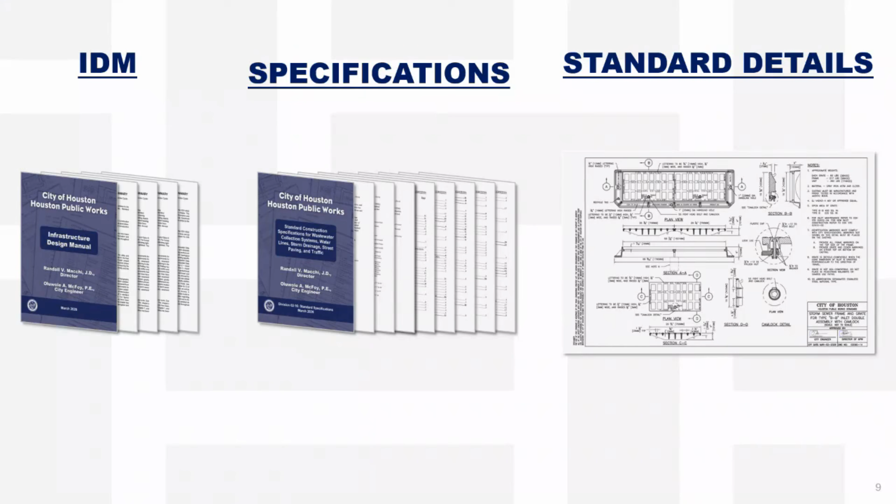The IDM specifications and standard details communicate the city's needs and capture lessons learned. It's my team's responsibility to lead this effort with the support of various stakeholders within Houston Public Works, other city departments, and external stakeholders.

We'll start with a quick overview of the review cycle process. I'd like to point out that an executive summary was released with this year's IDM. It includes a summary of the changes and implementation of the changes. This can be found in the first few pages of the IDM.

For current policy, each chapter in the IDM will be reviewed at least once every 5 years. The city has a review schedule that is posted on the website. The associated standard drawings and construction specifications are reviewed in conjunction with each IDM chapter being reviewed. This year's review cycle included Chapter 9 and associated construction specifications and details.

There's a process to address significant issues within our standards outside of the designated review year. However, care is needed to ensure all stakeholders are informed and changes have been properly vetted. A good example of this would be this year's changes to Chapter 6 of the IDM.

Also, changes prior to publishing can be made with the use of a supplement. The city had 2 supplements this year related to Chapter 9 that were incorporated into the IDM in 2026. Supplements, once properly vetted, must be signed by the city engineer and the director. Once a supplement is signed and put into effect, my team works to implement these updates and notify the community.

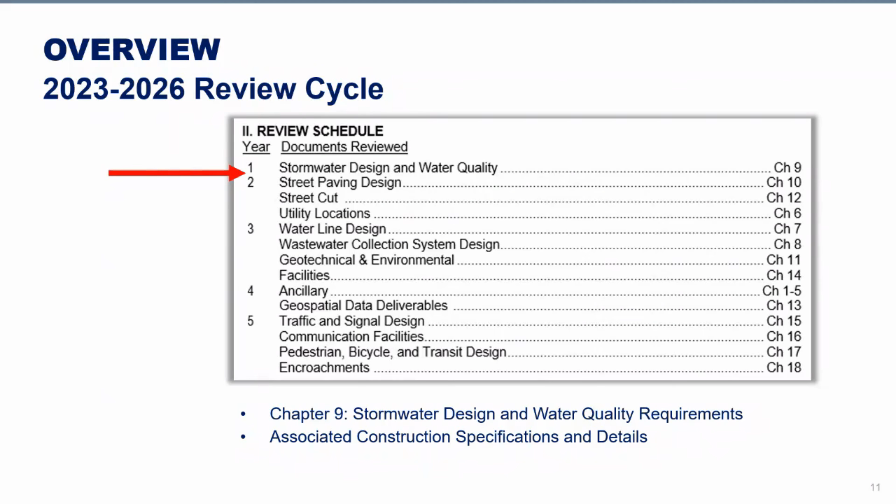The city communicated the open comment period on the Houston Permitting Center website. Comments were compiled, summarized, and provided to the review cycle committee. The committee met over several months, and a draft of the standard was created. From there, we met with external organizations for their input. The purpose of these meetings was to vet and coordinate all proposed changes before they were implemented.

This review cycle, we also had a change in city leadership, which identified other items in Chapter 9 that were to be addressed. These items proceeded through the process outlined, which in turn had a cycle through our coordination with our stakeholders and pushed our timeline into 2026.

In February 2026, we completed the final revisions and published the documents in March of 2026. That said, it should be noted that there were no new publications of the IDM and associated documents in 2024 or 2025. This edition of the IDM supersedes the 2023 edition.

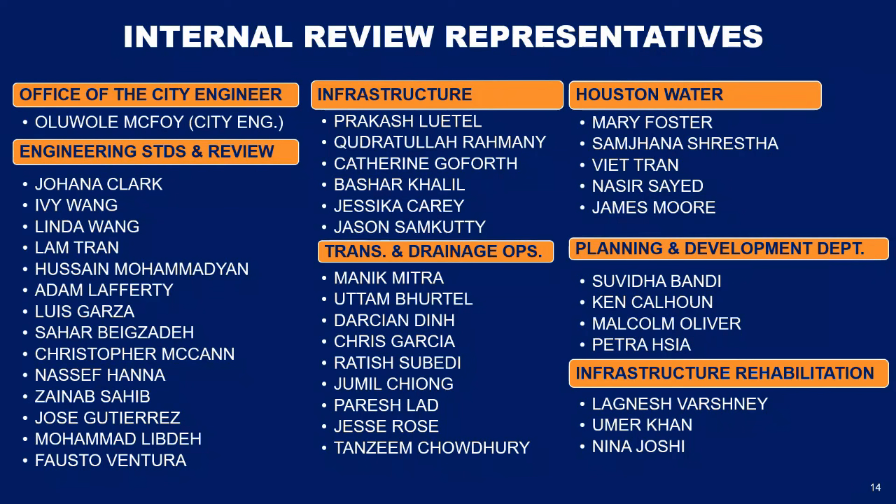Once the city has developed draft documents of all the proposed changes, we work with the external partners to gather additional input. Thank you again, external committee members, for working with the city on this cycle. We appreciate your support.

There's a 90-day design grace period for implementation of the City of Houston's 2026 edition of the IDM. For Houston Public Works Capital Improvement Plan projects managed by Houston Public Works service lines, 60% designs that have not been submitted prior to June 1st, 2026 must comply with all standards in the 2026 IDM.

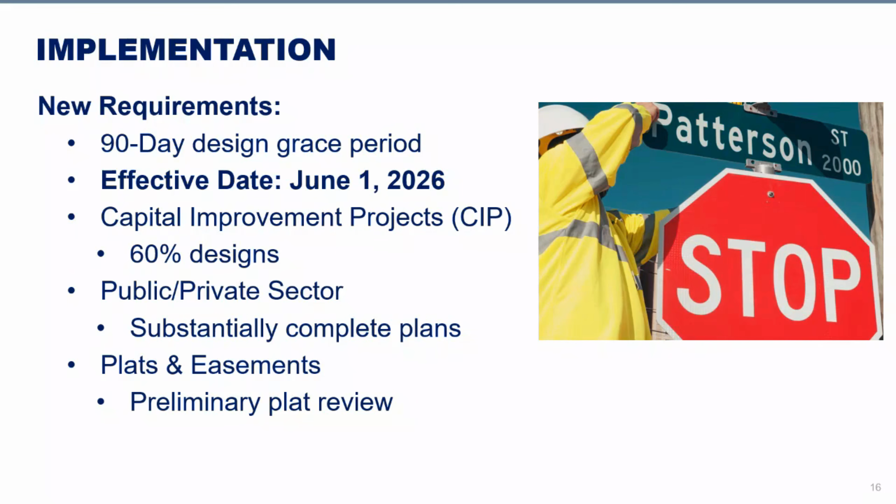For projects in the public or private sector, plans submitted for initial review after June 1st, 2026 must comply with all standards in the 2026 IDM. The city must receive substantially complete plans before June 1st to be grandfathered under the 2023 standards. For plats and easements, submissions for preliminary plat review after June 1st, 2026 must comply with the 2026 IDM.

For additional background, refer to the 2026 IDM announcement and IDM executive summary. If applicants have submitted a project prior to June 1st, 2026 and would like to use the 2026 requirements, the existing project must be canceled and a new project submitted.

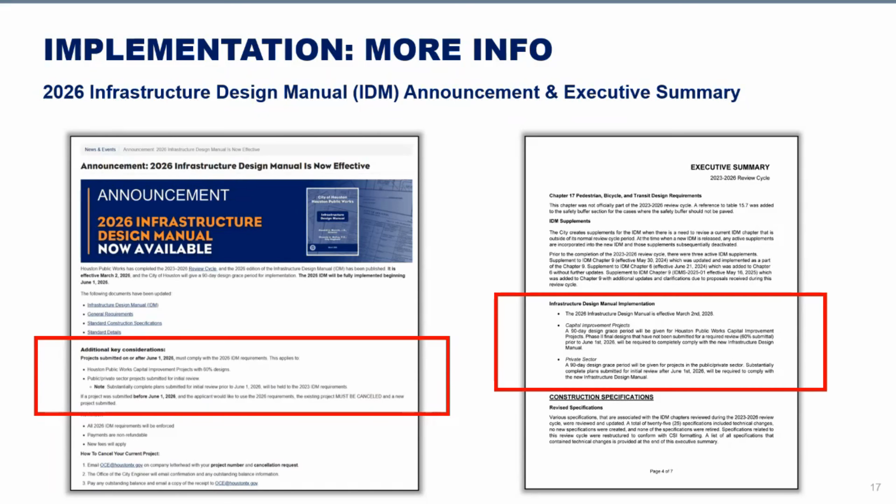Directions on how to cancel plans can be found in the 2026 IDM announcement. The IDM summary is provided at the beginning of the IDM document and gives implementation information for the IDM, standard specifications, and standard details.

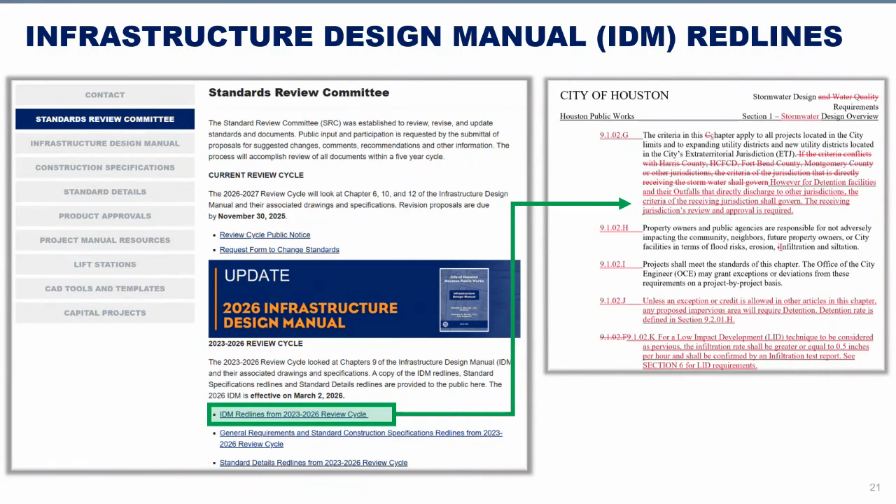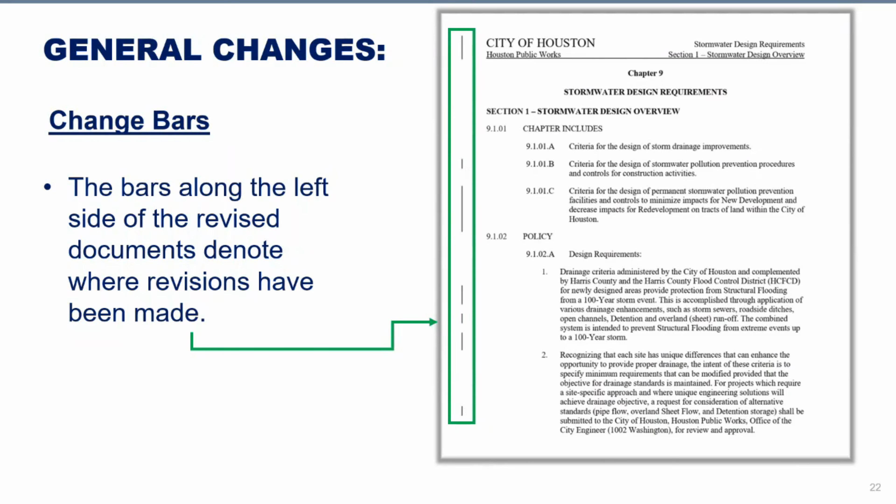Redline versions showing all changes are available online. In addition, revision bars are included in the standards to help easily identify updates. For this review cycle, change bars have been incorporated into the final document. The change bars are located on the left side of the page to indicate that a revision has been made to the content on the right side of the bar.

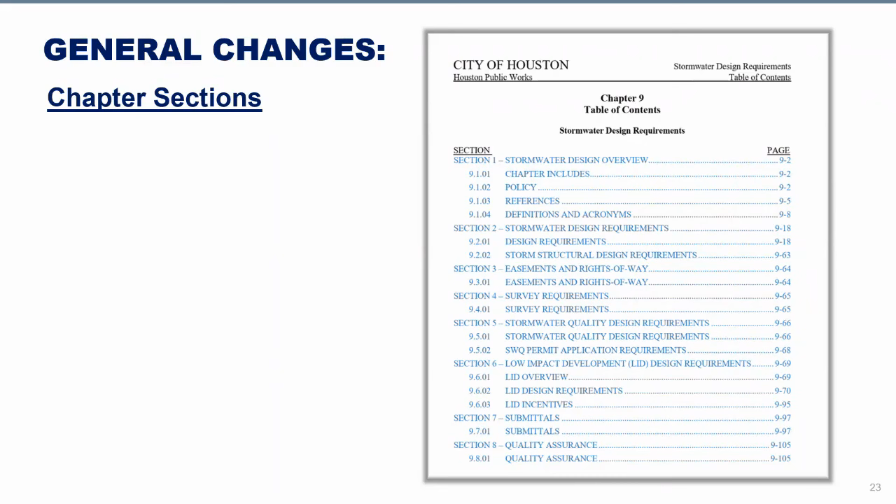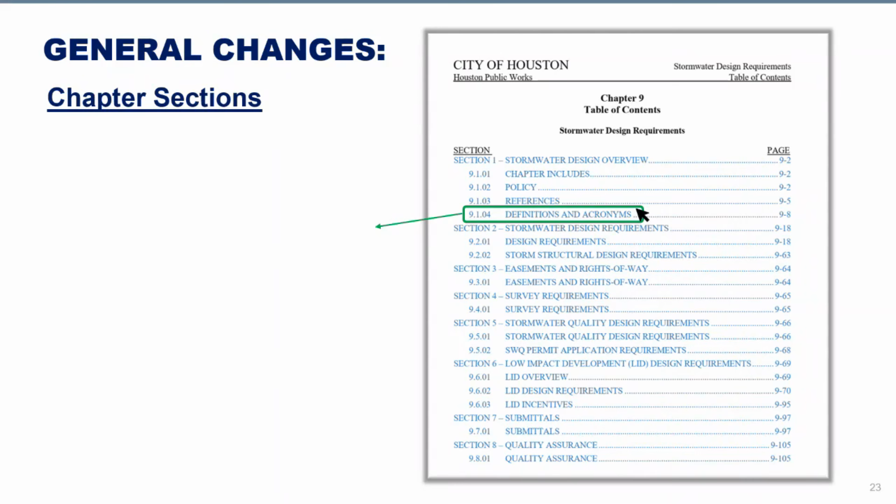Chapter 9 has been reorganized into sections to improve navigation throughout the chapter. In addition, all titles in the table of contents are hyperlinked to their corresponding locations in the document. Clicking any link in the table of contents will take you directly to the related paragraph, table, or figure.

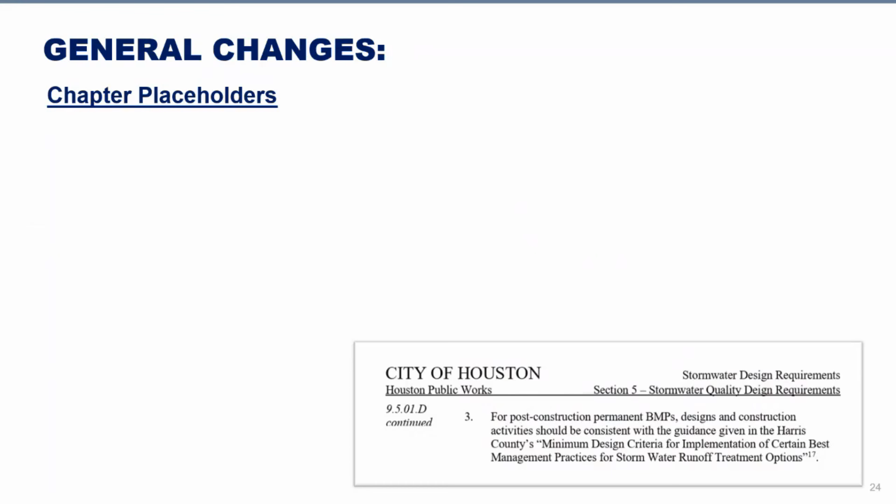We also continued adding placeholders throughout the chapter. As you navigate through the pages, you can now look at the top left corner to see the reference for the previous paragraph without needing to return to the previous page.

We added new definitions that were not included in the previous version of the IDM. In addition, during this review cycle, we went through chapters to ensure that only proper nouns and defined terms are capitalized. This concludes the general changes made during the review cycle.

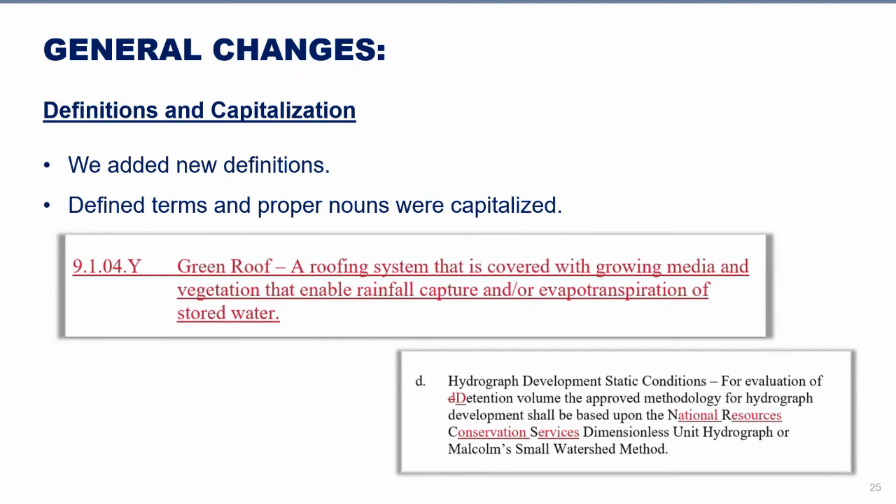Thank you, Christopher. Let's take a look at the major changes made to chapters 1, 3, 6, and 17 this review cycle.

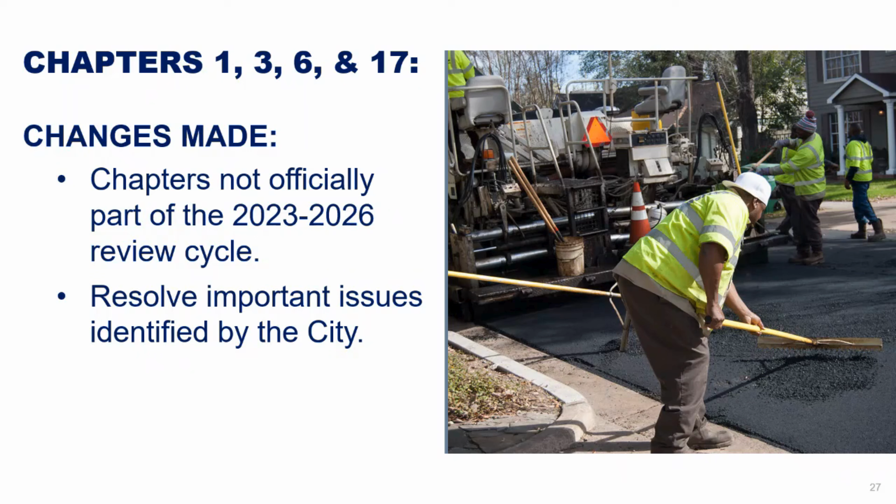These chapters were not officially part of the 2023-2026 review cycle. These changes were made to resolve some important issues identified by the city.

In Chapter 1, General Requirements, within the submittal requirements for publicly, privately funded projects, it was clarified when a project would expire.

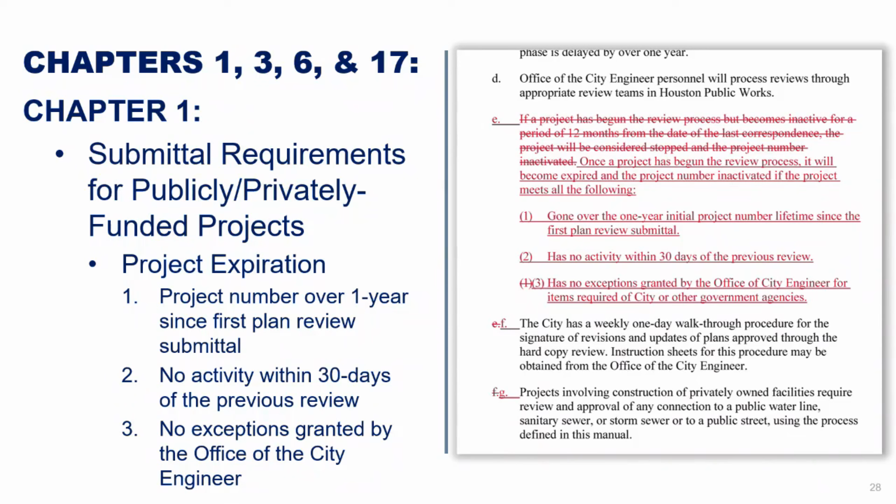Going forward, a project that meets all three of the following criteria will be considered expired: the project has gone over 1 year initial project number lifetime since the first plan review; the project has no activity within 30 days of the previous review; and the project has no exceptions granted by OCE for items required by city or other government agencies.

Chapter 3, Graphic Requirements, had the following changes this year. Publicly, privately funded projects that are not considered capital improvement projects shall provide the major utilities and overall scope of work on the cover sheet as a part of the project title.

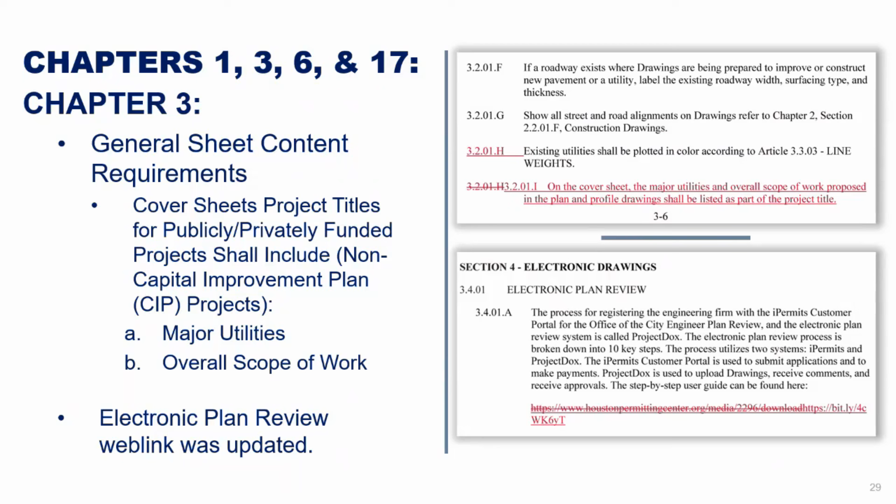Also, a new website link for electronic plan review has been provided.

Changes to Chapter 6, Utility Locations, within the Subsurface Utility Exploration, or SUE, section were made. It was clarified in 2 separate articles that for both trench and trenchless construction, a higher level of SUE requirements is invoked when vertical or horizontal clearances are less than required by this manual from the proposed utility to existing water lines or sanitary sewer force mains.

These requirements in the 2023 version of the IDM apply to clearances to all existing utilities. Therefore, the applicable scope has been reduced to apply only to existing water lines and sanitary force mains.

For trench construction, if the clearances of the manual cannot be met, the engineer isn't required to go directly to a level A SUE. The requirements have been updated to allow a stepwise increase in level of SUE. A level B is required to confirm the location of the existing utility. If a level B cannot provide an accurate location, then a level A SUE is required.

It is also noted that a level A or level B SUE must be provided to grant a variance for the utility clearance.

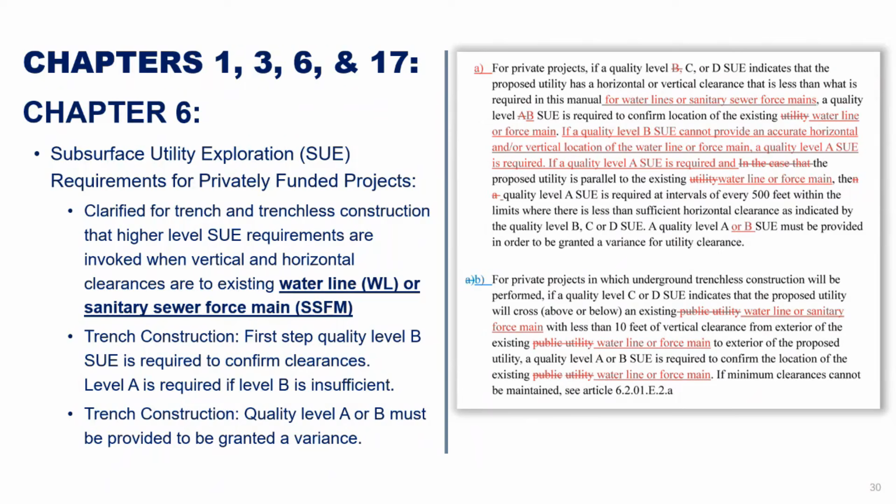This requirement was added to protect utilities in side lot and back lot easements from non-utility underground structures. Particularly, the city has frequently experienced damage to wastewater lines due to structure encroachments.

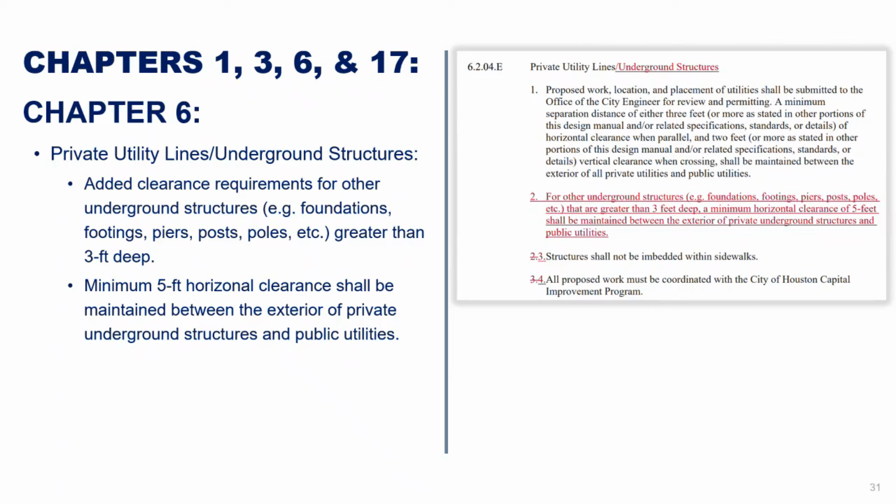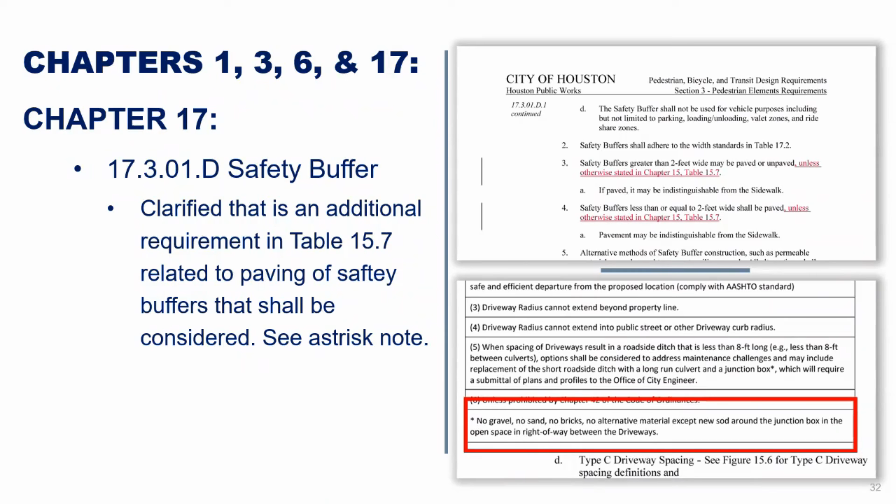That concludes the general changes in Chapters 1, 3, 6, and 17. If anyone has any questions on these changes, please ask your questions in the chat box.

So Christopher, have we received any questions yet? Thank you, Luis. Firstly, I can proceed with a few frequently asked questions that we generally tend to receive.

The first question here would be, does the overall scope of work proposed on the plan need to be added to CIP project cover sheets?

Great, thanks for asking that. No, the current titling used on CIP projects will remain the same. This scope will be added to public, privately funded projects only.

Okay, thank you, Luis. One additional question we have here is, what was the additional requirement in Table 15.7 that is now referenced in Chapter 17?

That's a great question. The item being referenced is that paving in the safety buffer is not allowed around junction boxes in the open space in the right-of-way between driveways. That was a note in Chapter 15, so we added that to make the engineer aware in Chapter 17.

The chapter has been reorganized, making it easier to follow. All technical terms are now defined, and previous memos and detention supplements have been incorporated. Chapter 9 updates will be presented in 3 sections. I will initiate sharing all topics part of the update, and the following sections will present those more in detail, highlighting differences between the 2023 and the 2026 IDM editions.

The primary updates implemented in Chapter 9 include a policy update that clarifies detention and outfall requirements to be applied to developed sites that outfall into jurisdictions different from the City of Houston. Updates to the software allow for modeling and design of drainage facilities, and there are updates to the runoff coefficient C values.

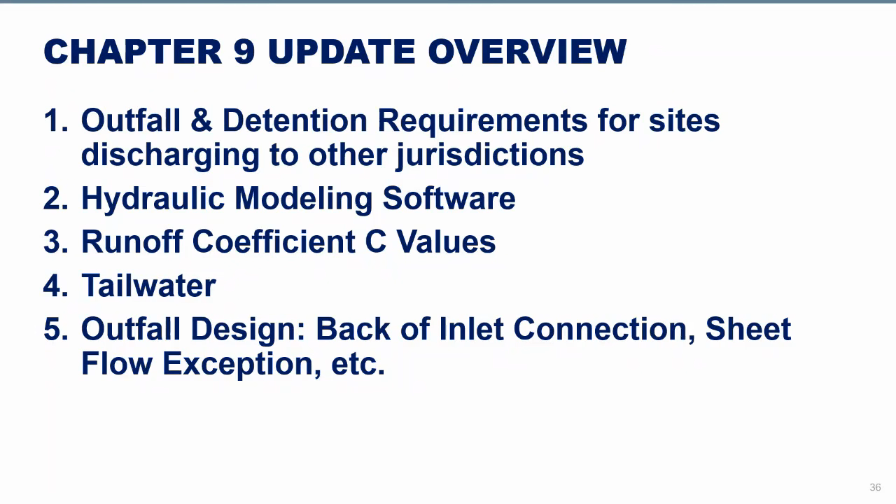Clarification was provided for the tailwater elevation section selection for hydraulic grade line analysis, along with updates to outfall design, including back of inlet connection, sheet flow exceptions, and others.

Criteria tables with detention design requirements were updated. We expanded on exemptions to detention criteria, including aspects such as maintenance work, Lake Houston watershed, and others. Detention credits were revised and details elaborated for complete clarity, including credits for existing and removing impervious cover, projects in the public right-of-way, and definition of de minimis impact.

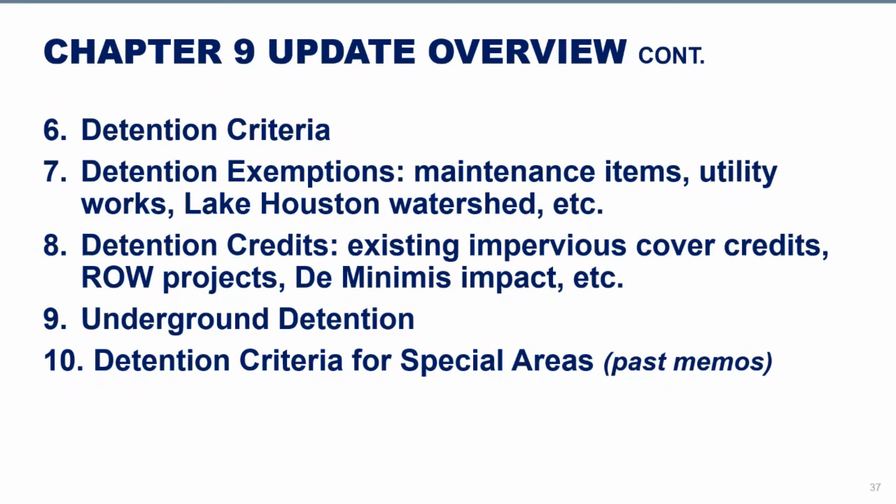Others. Criteria and guidelines for underground detention applications were added. Also, criteria defining past memos for certain areas in the city were incorporated in the chapter with corresponding maps.

Updates were added to the thermoplastic pipe requirements. Information for the various inlet types was updated. The stormwater quality section was updated and improved for clarity. Details and guidance were added to stormwater pollution prevention plans. And lastly, and of great importance, updates were incorporated in the low impact development section.

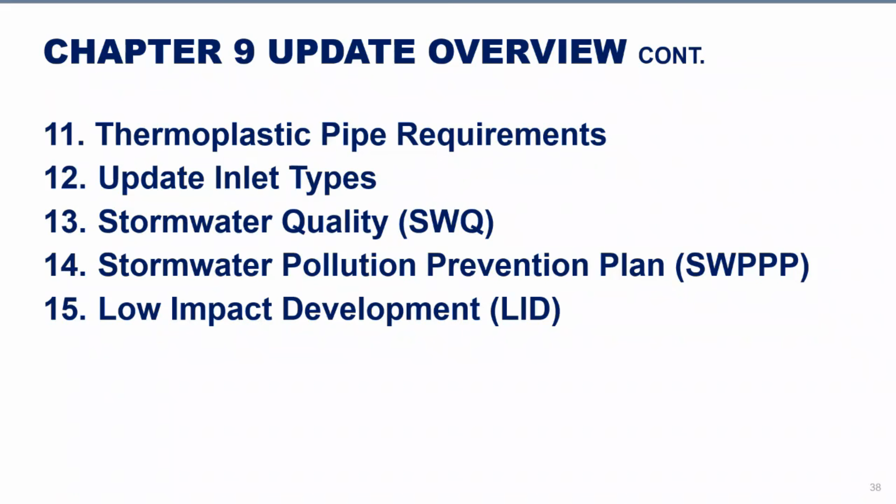Now, to dive deeper into these updates to Chapter 9, I'll pass the floor over to Managing Engineer Ivy Wang.

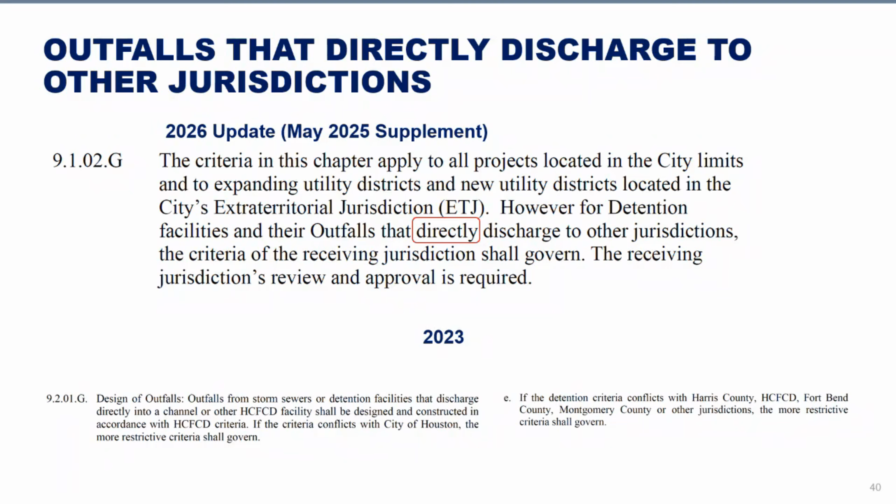First, the requirements—this is a sort of policy update. When you outfall directly discharges into another jurisdiction, you must comply with that jurisdiction's outfall and detention design criteria and get their approval. Keep in mind, the most restrictive requirements no longer apply.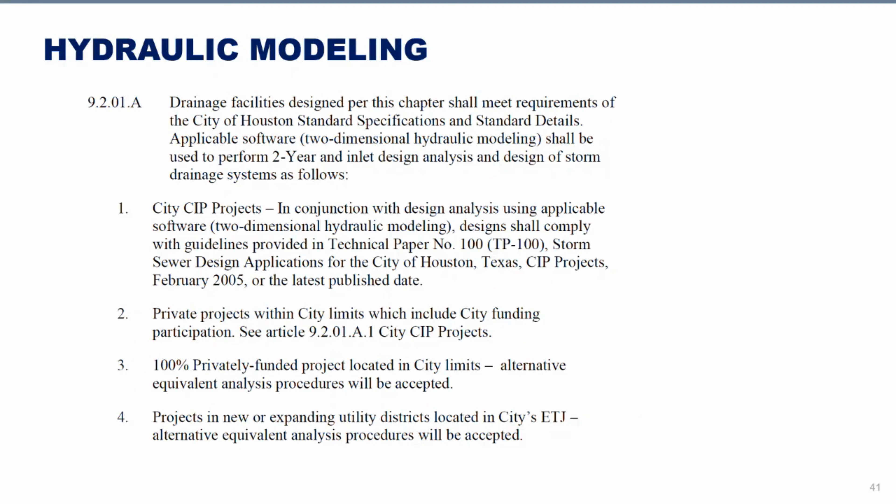Hydraulic modeling: For capital projects or city fund projects, 2D hydraulic modeling shall be used to perform 2-year storm design and inlet design analysis. For private fund projects, or municipal utility district, or ETJ projects, alternative equivalent analysis modeling will be accepted.

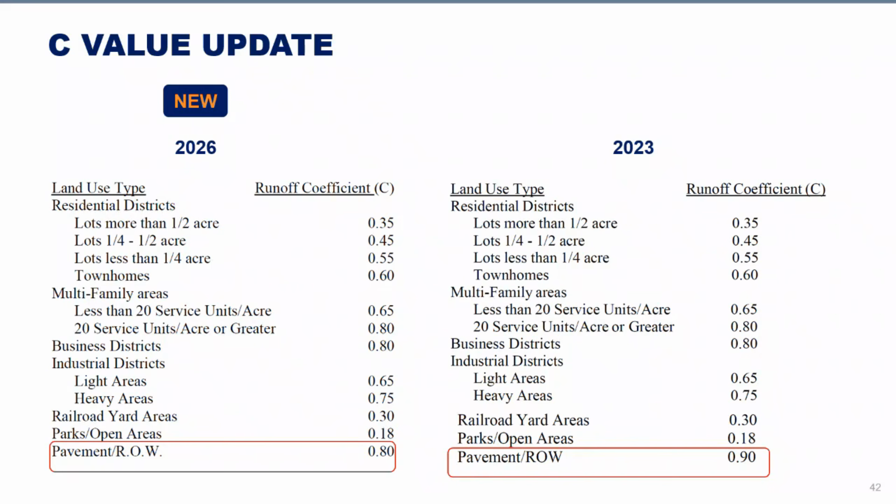C-value update: this year, the city only updated one C-value. Pavement at right-of-way has been revised from 0.9 to 0.8.

Tailwater requirements have been divided into two categories, one for capital projects and one for non-capital projects. For capital projects, the 2,000 feet threshold has been removed. A single standard applies regardless of the project's distance to the receiving channel. All analysis must be extended to the receiving channel unless a justified exception is approved.

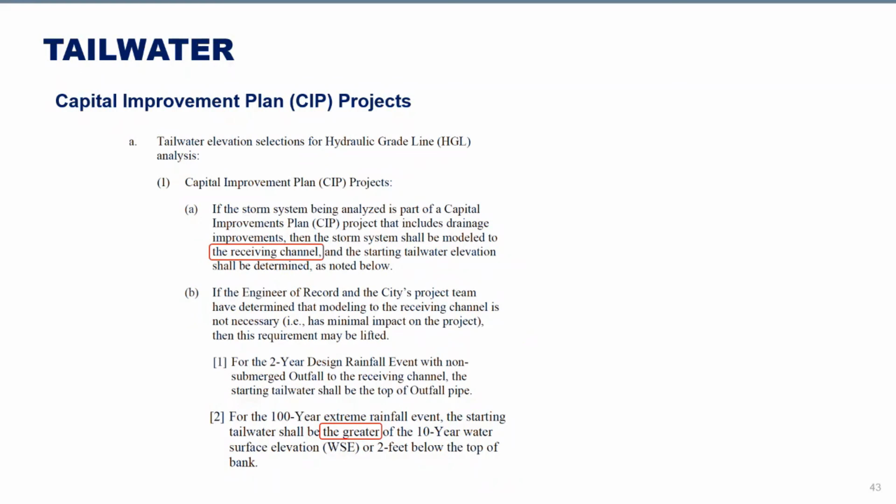For the 2-year storm event, the starting tailwater elevation should be set at the top of the outfall pipe. For the 100-year storm event, the starting tailwater elevation should be the greater of the 10-year water surface elevation, or 2 feet below the top of bank.

For non-capital projects, the 2,000 feet threshold remains in effect with updated requirements. If the receiving channel is within 2,000 feet of the project limits, the same requirements as capital projects apply. If the receiving channel is more than 2,000 feet from the project limits, the hydraulic model must include at least 2,000 feet of downstream trunk line from the project limits. The starting tailwater elevation should be established at the downstream end of this 2,000 feet model extent.

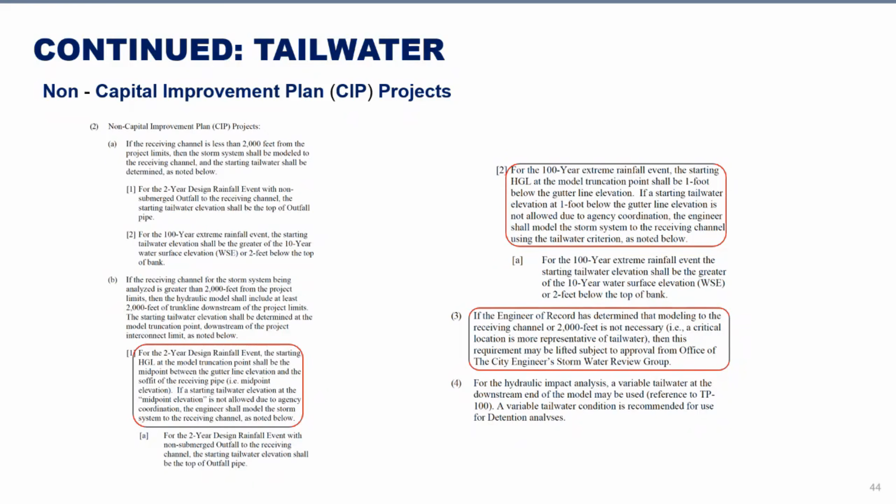For the 2-year storm event, the starting tailwater elevation should be set at the midpoint elevation between the gutter line and the soffit of the receiving pipe. For the 100-year storm event, the starting tailwater elevation should be set at 1 foot below the gutter line elevation. Any exception must be approved by the Stormwater Review Group in the Office of the City Engineer.

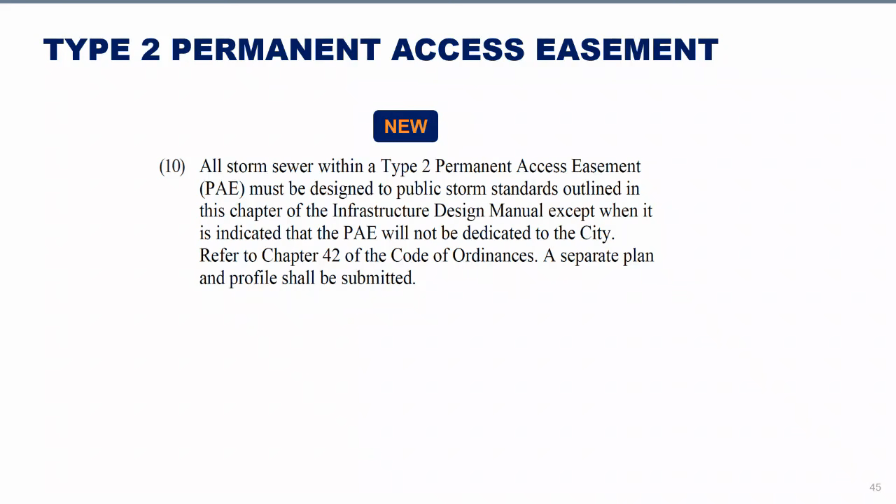Type 2 Permanent Access Easement, or PAE. Proposed storm sewer located in the Type 2 PAE easement must be designed to meet Chapter 9 requirements unless the PAE easement won't be dedicated to the city. Also, a separate plan and profile must be submitted to the Office of City Engineer for approval, covering the entire stormwater sewer within the easement and continuing into the city right-of-way.

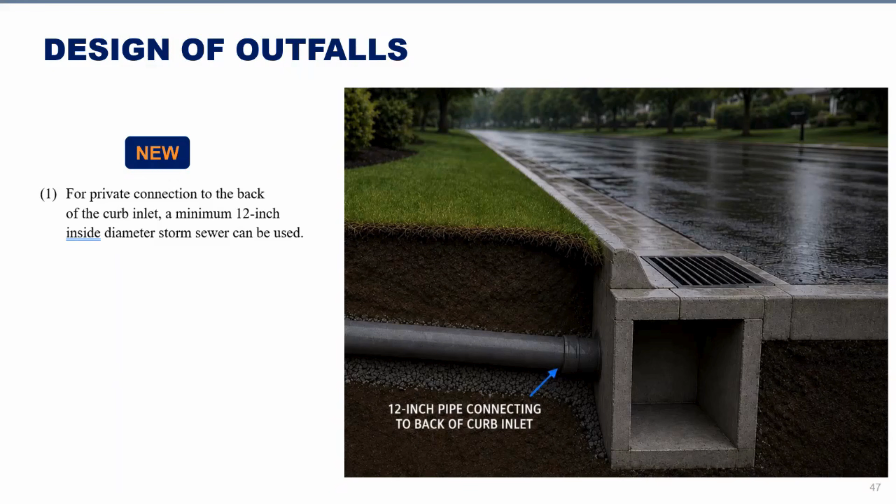Design of outfalls: this is a new requirement. It allows a minimum 12-inch pipe instead of a 24-inch pipe to connect to the back of an inlet at the city right-of-way. This requirement applies to all projects.

Sheet flow exception: this applies only to single-family residential projects. Typically, no sheet flow from the developed property will be allowed to drain into adjacent private properties or city right-of-way. There are a couple of cases under specific exceptions listed below, where sheet flow will be allowed to drain into the adjacent right-of-way only.

Case 1, typically under detention criteria 1: a single tract containing one house with a direct driveway access. The tract area should be less than or equal to 15,000 square feet, with impervious cover less than or equal to 65% of total tract size. This case falls under category 1 as highlighted in red in the detention table. Here's the example on the right side.

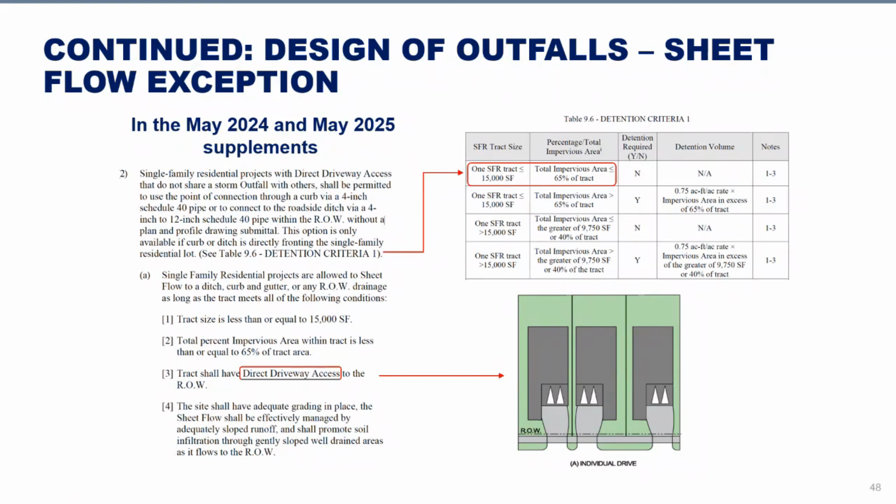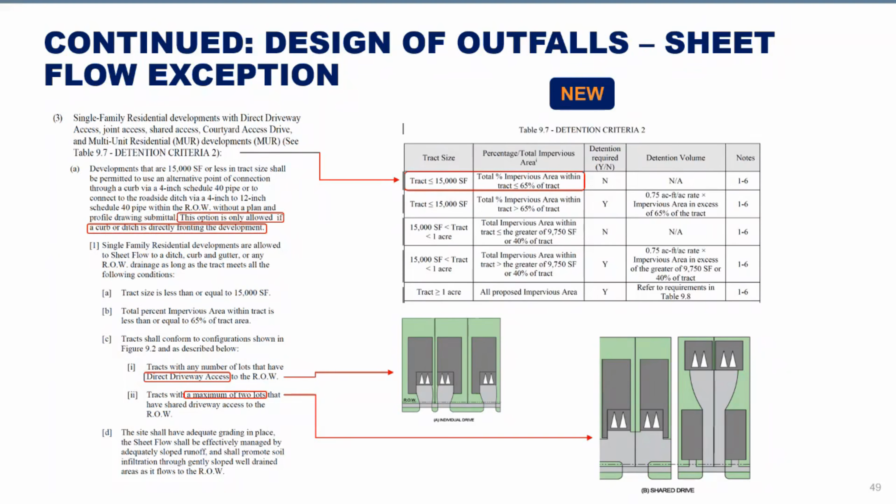Detention updates. I will break down the detention requirements into 3 parts: standard detention requirements, detention exemptions, and detention credits. For standard detention, as you know, 3 criteria along with 3 corresponding tables are used to define the standard detention requirements.

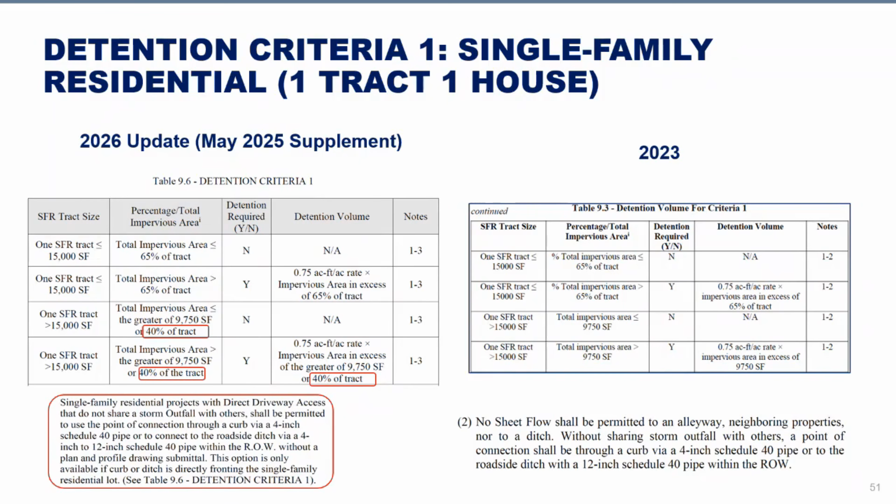Criteria 1. This table has been updated to add an alternative threshold of 40% impervious area for tract size over 15,000 square feet, which was updated in the May 2025 supplement. Additionally, pipe connecting to the ditch can be smaller than 12 inches, but the minimum size is 4 inches. This requirement applies only to a single tract that does not share a storm outfall with others, and also has a ditch located in front of the property. In this case, a plan and profile are not required.

Criteria 2. It has also been updated to add an alternative threshold of 40% impervious area for tract size over 15,000 square feet, but less than 1 acre. Additionally, pipes connecting to the ditch can be smaller than 12 inches, but the minimum size is 4 inches. This requirement applies only to tract size less than or equal to 15,000 square feet and has a ditch located in front of the property. In this case, plan and profile are not required.

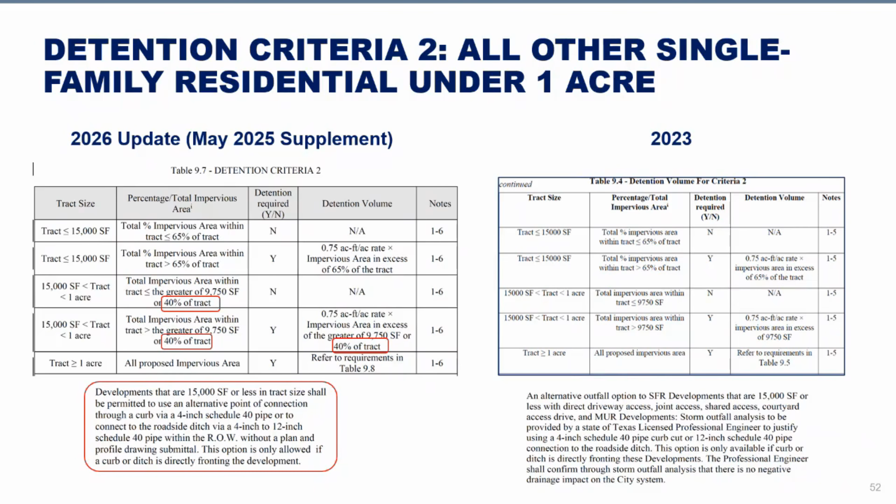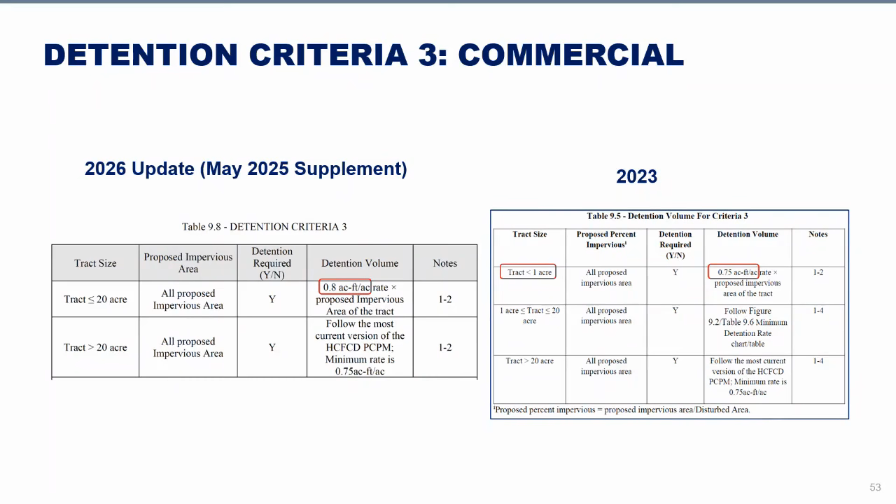Criteria 3. All developments with 20 acres or smaller shall apply a uniform detention rate of 0.8 acre-feet per acre. Please note, the new criteria simplified the table and removed the less than 1 acre category, combining everything into the 20 acres or smaller category. The detention rate has been revised from 0.75 acre-feet per acre to 0.8 acre-feet per acre. This previous detention chart and associated table in 2023 Chapter 9 has been removed, and the term 'disturbed area' has also been removed.

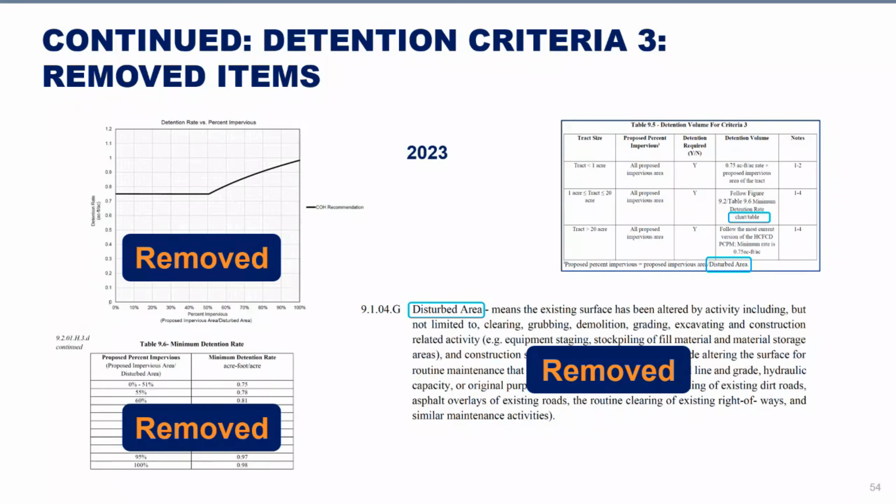Detention exemptions. Some detention exemptions have already been introduced in the May 2025 supplement. Typically, detention is waived for development over existing pavement under the following scenarios.

Scenario 1, covered under Article number 1: this existing impervious cover is not redeveloped. For example, installation of charging station equipment, adding canopies, or shade structures.

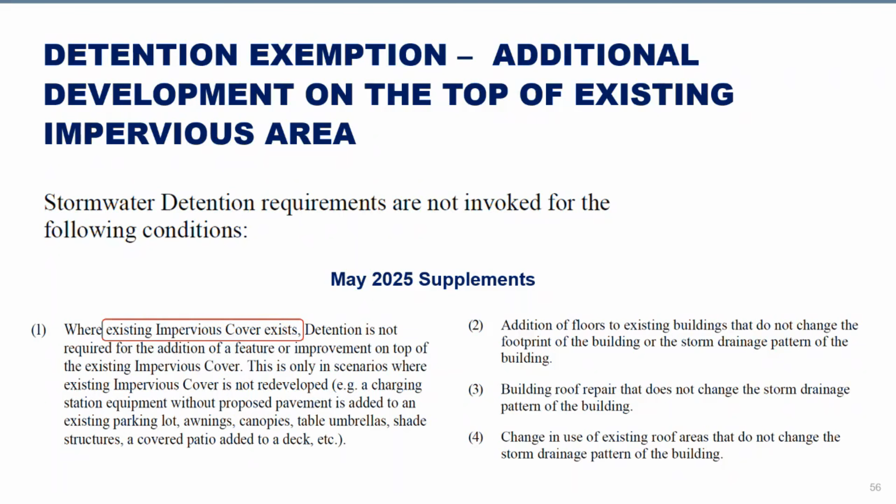Scenario 2, covered under Article numbers 2 to 4: development is proposed, but there's no change to drainage patterns. For example, adding floors to an existing building, roof repairs, or changing roof use.

Scenario 3, covered under Article number 5, this is new. Maintenance activities are defined in Article 9.1.04.jj. Maintenance activity means any work done to maintain the original line and grades, hydraulic capacity, or original purpose of the site, and does not allow any increase in impervious area.

For example: asphalt overlays on existing roadways, repairs to existing parking lots including use of different materials, and repair or replacement of underground utilities. Please refer to Article 9.2.01.h.3.n for additional details.

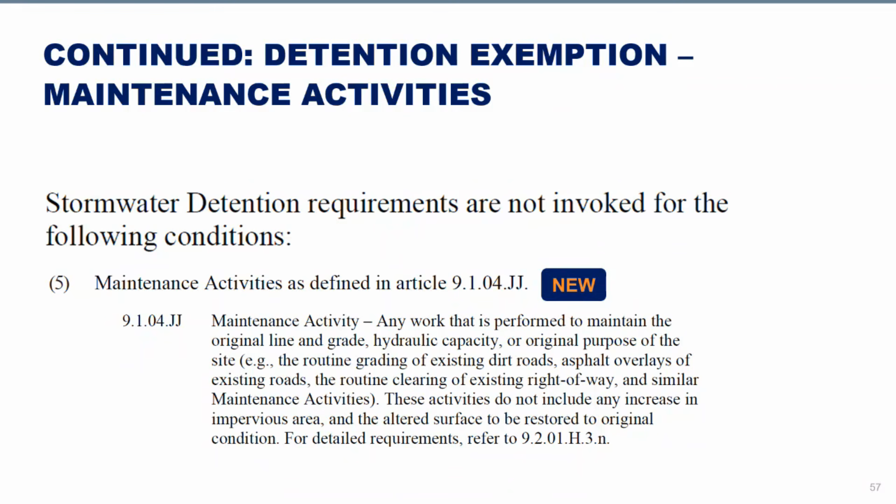Detention requirements are exempt for those activities as long as the existing drainage pattern is maintained.

Lake Houston. If the development is entirely within the Lake Houston watershed and it discharges directly to Lake Houston, detention is exempt. However, if only a portion of the project lies within the watershed, a drainage analysis is required, and this analysis must be extended to Lake Houston.

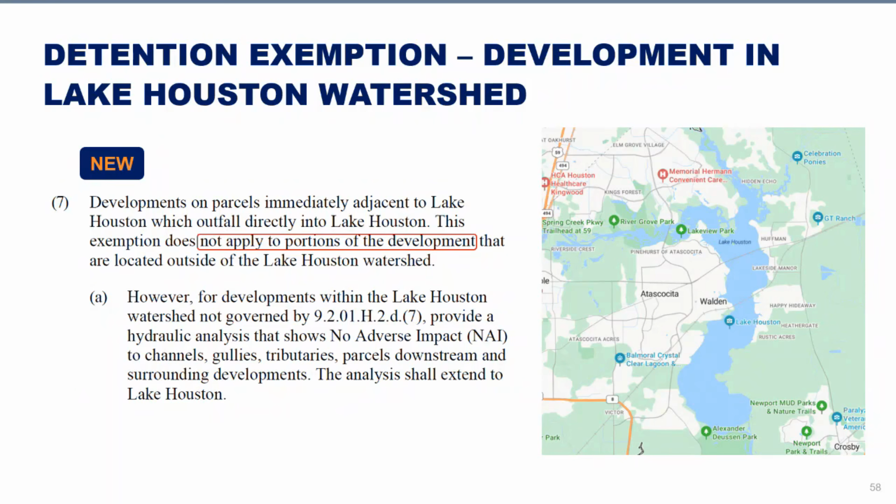As you see here, 3 previous detention memos have been incorporated into Chapter 9, which covers Central Business District, Texas Medical Center, and the Lower Buffalo Bayou area. If your project is located within those specific areas, detention is not required, but you must implement low-impact development or LID design features to help reduce runoff to the downstream systems. Additionally, projects in Lower Buffalo Bayou must also provide a direct connection to the bayou.

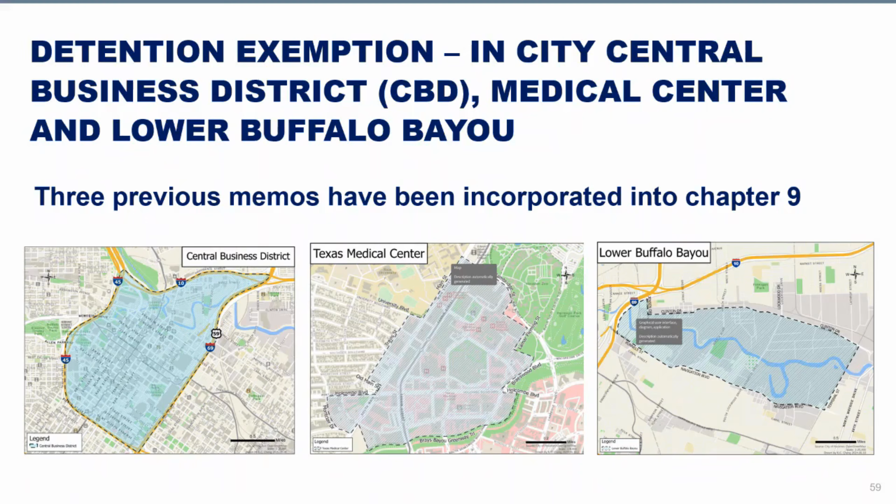Detention credits. For redevelopment over an existing impervious area, which falls under detention criteria 3, detention storage credit may be applied at the rate of 0.4 acre-feet per acre. Supporting documents such as surveys and photos are required to qualify. Final detention should be determined using the equation provided here, highlighted in red.

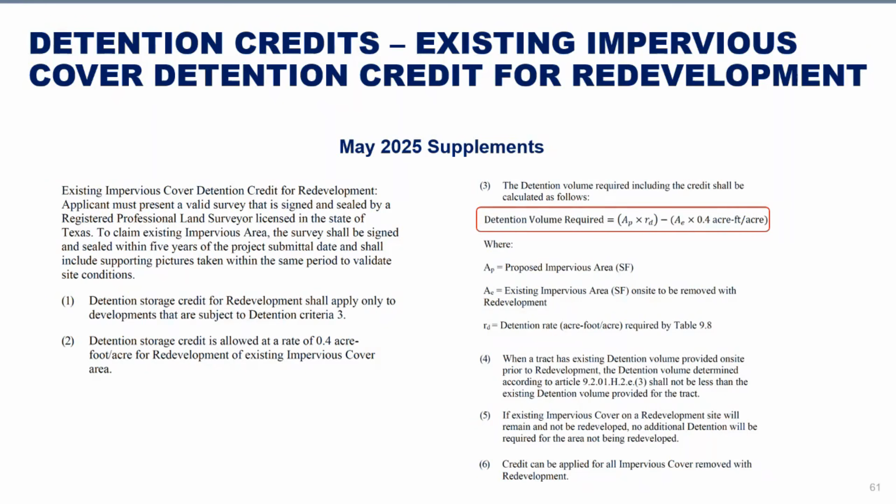If a development increases impervious area in the city right-of-way, for example adding sidewalks, left turns, monuments, or travel lanes, detention is not required. However, a 2-year storm capacity analysis must ensure the existing system can handle the additional runoff from this development. If not, further analysis must confirm the 2-year HGL stays below the gutter line, and the 100-year HGL remains below the maximum ponding elevation.

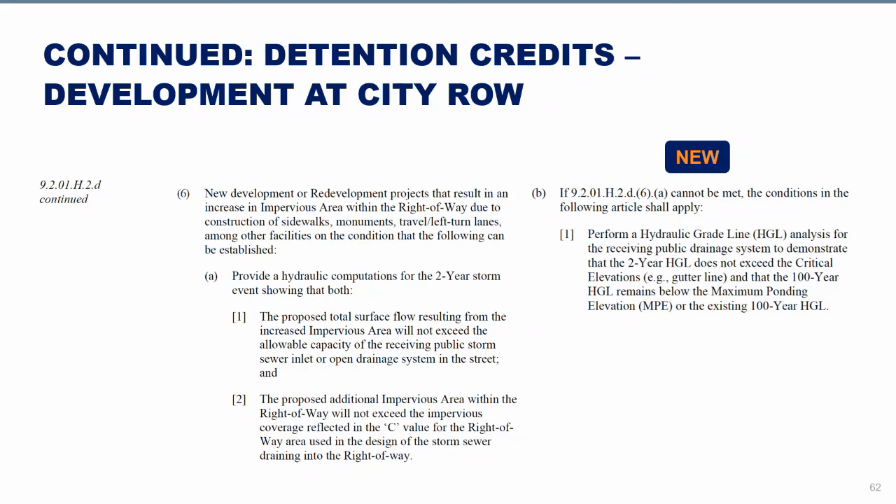Legacy projects are developments where the detention system and the storm sewer has been permitted and fully constructed based on a master drainage plan approved after 2002. Those projects can complete their remaining build-out under the original approved drainage plan without being subject to new or additional detention requirements if they meet qualification requirements provided in this article.

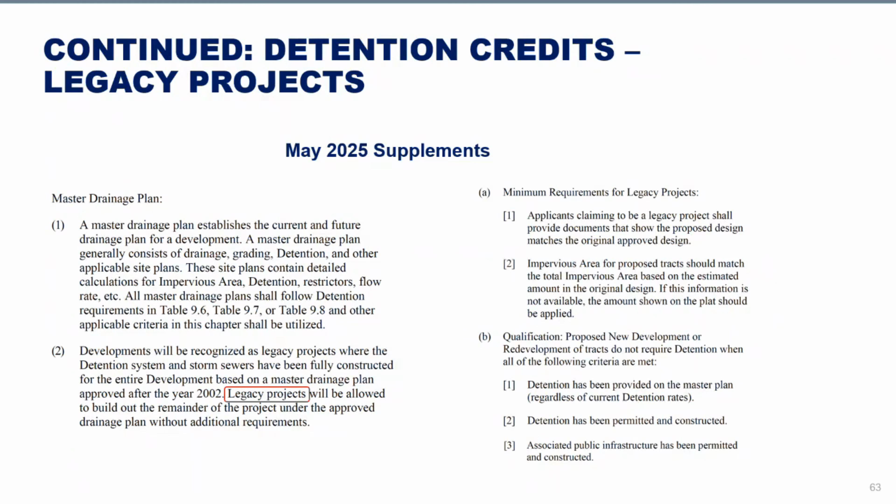Detention credits for dry grass lined basins is not automatic. It may be approved only when supported by an infiltration report demonstrating soil infiltration rate and a hydraulic analysis confirming the basin's performance in managing runoff from this development.

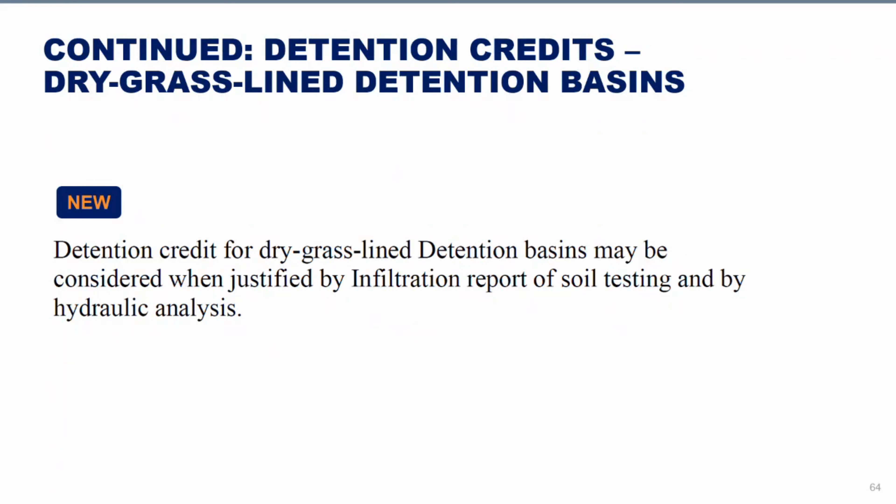De minimis impact credits. Keep in mind, these credits only apply to redevelopments where the increased impervious area is small and has a minimal impact on the drainage system. Common examples are adding EV charge stations to existing parking lots, adding a deck or swimming pool to a home, or adding parking spaces to an existing parking lot.

For single-family residential development that falls under detention criteria 1 and 2: Scenario 1, when tract size is 15,000 square feet or smaller, you can add up to 5% more impervious area, for example adding a house, driveway, patio, and others without detention. This applies only after you exceed the normal 65% limit, but your total impervious area cannot go over 70% of the tract size.

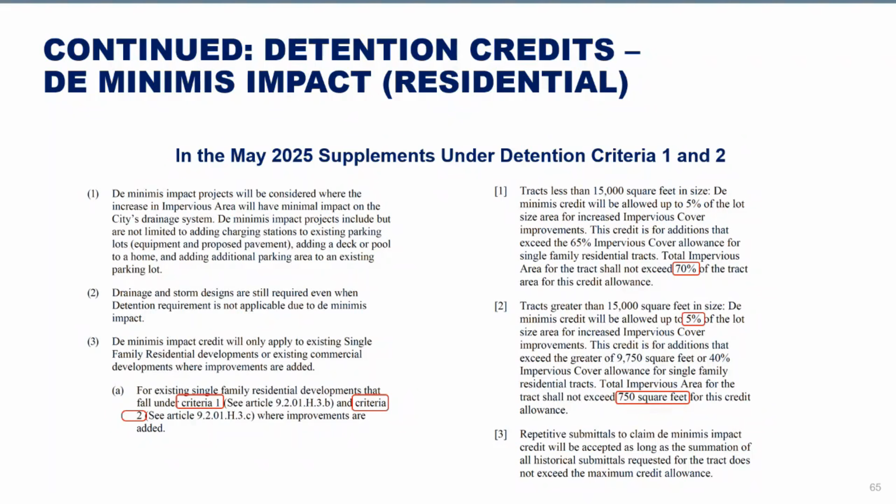For development that falls under criteria 3: Scenario 1, tract size 20 acres or smaller, you can get a credit for up to 1% of the total tract area. This credit is one time only, you cannot use it again later. Scenario 2, tract size greater than 20 acres, this is a case-by-case decision based on drainage analysis.

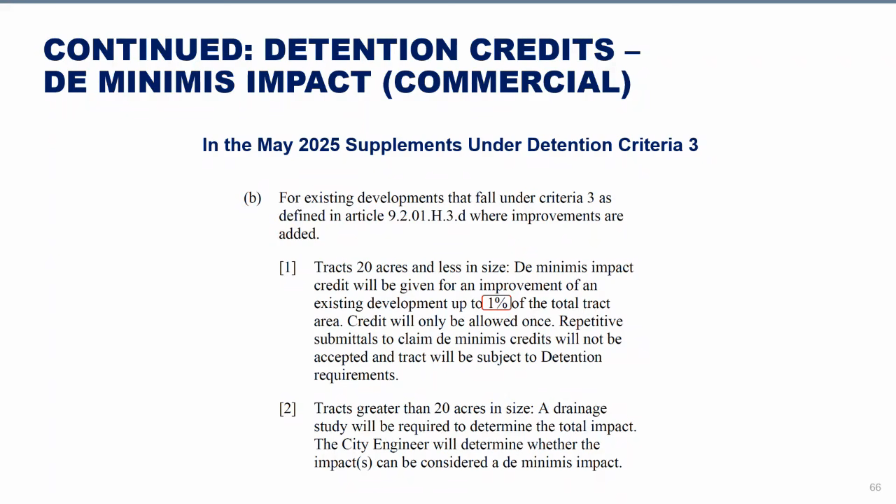Additional detention requirements. This year, the city has introduced new requirements for underground detention.

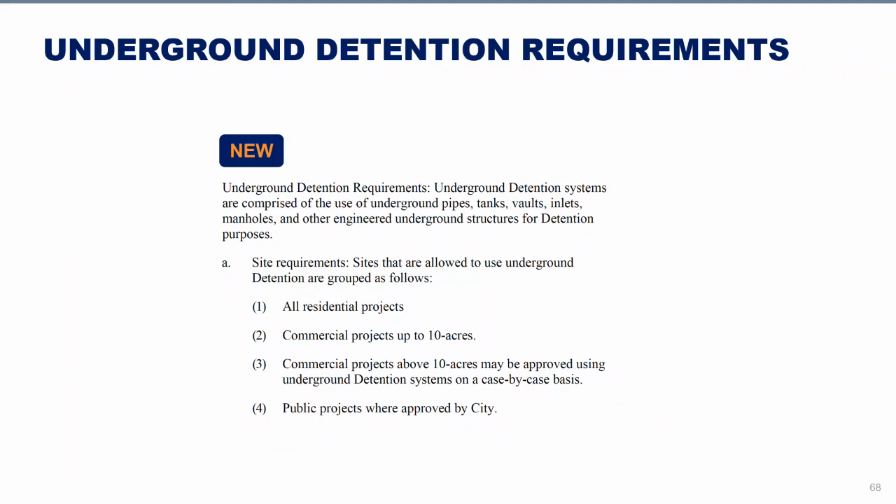Eligibility: Residential, allowed for all projects. Commercial, allowed for sites up to 10 acres; large sites require case-by-case approval. Public projects allowed only with specific city approval.

Design and engineering requirements include, but are not limited to, the following. Capacity must include overflow for extreme storm events and dry out within 48 hours. Safety requires a minimum of 12 inches of cover on top of the detention structure and locked access points.

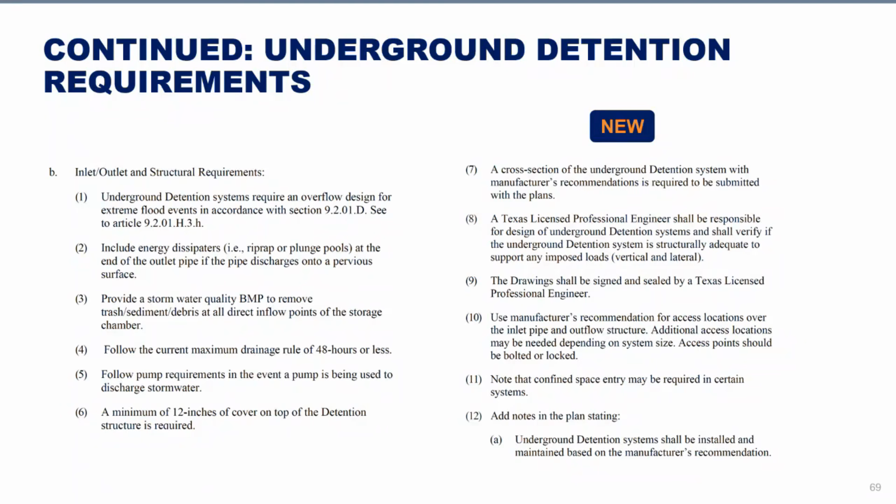Stormwater quality must include BMPs to remove trash and sediment at the inflow points. Keep in mind, all plans or designs must be signed and sealed by a Texas professional engineer.

Maintenance and ownership. Schedules: the plan must include manufacturer-specified schedules for trash and sediment removal. Inspections required for pre-treatment devices and potential structure problems like sinkholes.

Right-of-way agreements. If the underground detention system is located in city right-of-way, you must get city approval, and they also require a formal maintenance agreement with the City of Houston.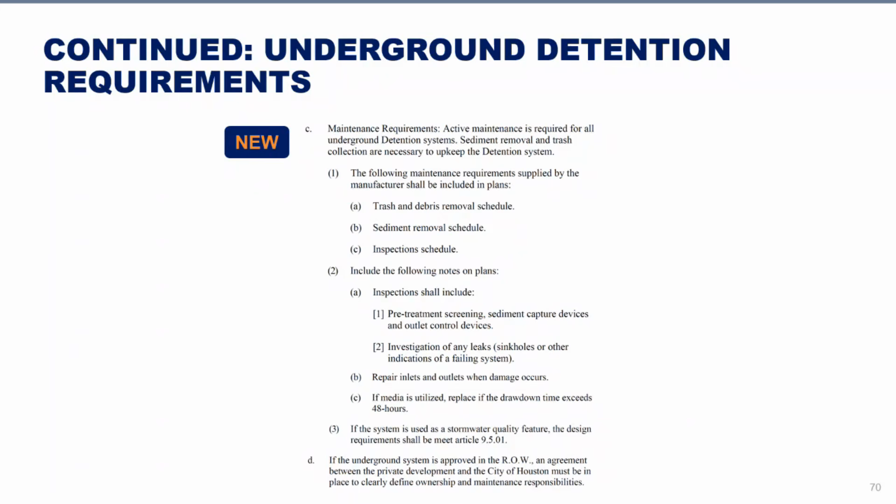That concludes my presentation. Thank you.

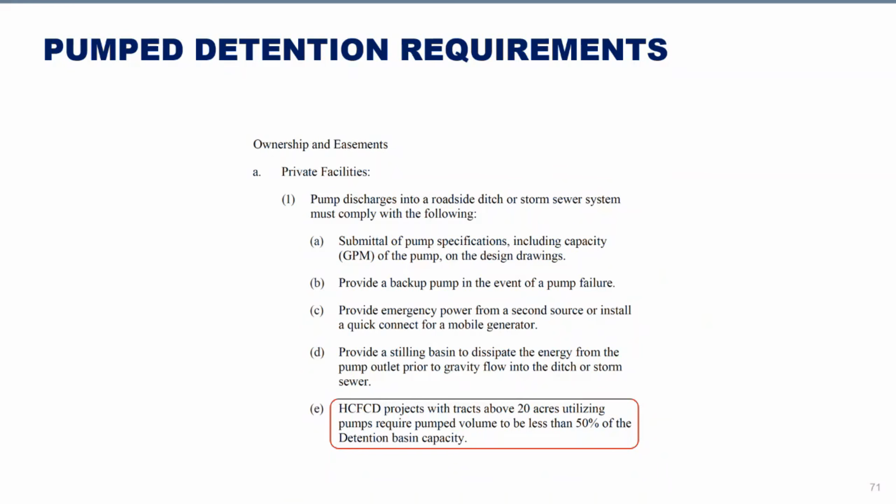Yes, thank you, Ivy. I have the first question ready for you. Do I need to submit a plan and profile for proposing a connection less than 24 inches to the back of an inlet?

Thank you, Linda, that's really a good question. Yes, at the right-of-way, it is required in IDM Chapter 3 that any utility line size 4 inches or larger must provide the plan profile unless a specific exception is permitted.

Okay, let's go to the next one. All right, next question: Do all shared driveway tracts under 15,000 square feet that are also exempt from detention qualify for sheet flow? This also is a great question.

Now, it depends on the project conditions. To qualify for sheet flow, the tract must also meet the following additional requirements. The tract may contain a maximum of 2 lots with a shared driveway. Tract must have a direct access driveway to the right-of-way, provide adequate side grading, and the total impervious cover must be less than or equal to 65% of the total tract size.